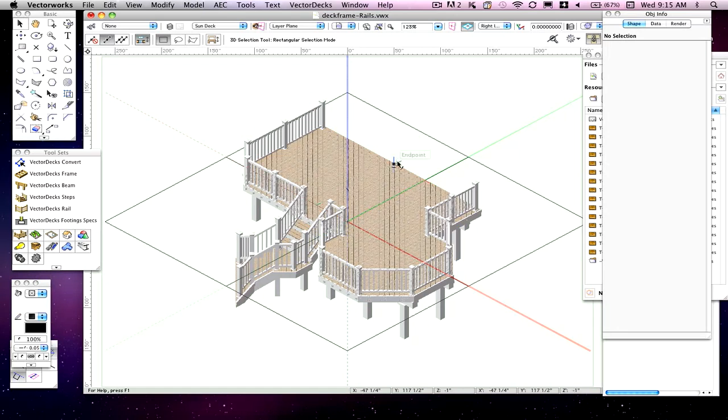In this tutorial, we're going to design a custom set of rails for this sun deck utilizing the frame's sun deck rail settings button with the custom settings option. I covered how to work with all these different dimension changes and options in this window in my custom settings tutorial, but now let's put them to work.

For this example, I'm going to create a wrought iron type railing system, something lighter in appearance. I'm going to keep the railing height at 36. No need to change those post max on center, keep those the same. Now the post on an iron type railing could be smaller because of the strength involved, so I'm going to downsize these to 2 inches.

And the 2-inch width, 2-inch depth. The top rail width needs to fit within those 2 inches, so I'm going to narrow this down to, let's say, 1.5 inches. And its depth, I'll leave that alone.

The bottom rail width, the same thing. It generally needs to be the same or smaller than the top. Let's make that the same as the top. I'll leave its depth the same. I'm also going to leave that opening at the bottom of the rail the same.

Now the vertical pickets themselves in an iron type railing could be quite a bit smaller. Let's make those 3/4 inch, and I'm going to maintain that maximum picket opening to 3 5/8. Now we're ready to apply that change.

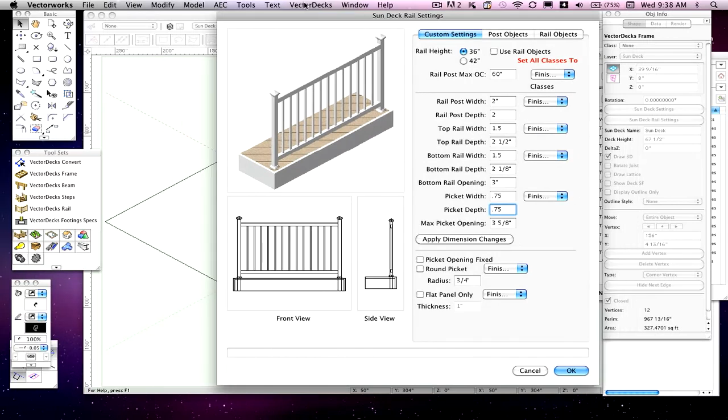All you need to do here is click OK. If you click Cancel, it'll go back to its defaults. So I'm going to click OK, and there's a lot of changes because it's going to change the railings throughout the entire deck. As you see there, it's got that lighter metal iron type of appearance to the sun deck.

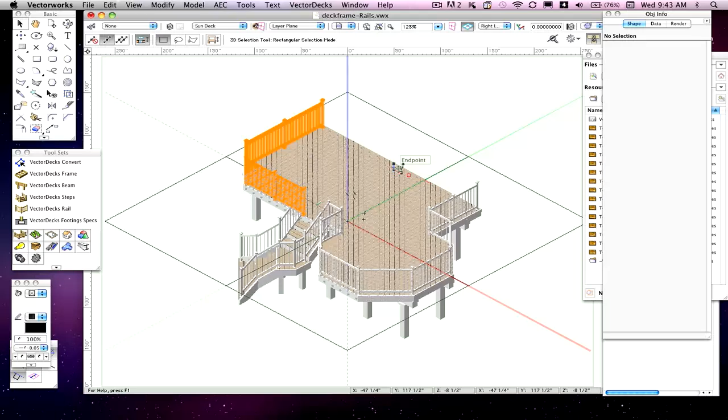And because each rail object and steps had its use deck info checked, the frame settings automatically updated the rails throughout the entire deck. That's the advantage of having that rail control in the sun deck frame settings.

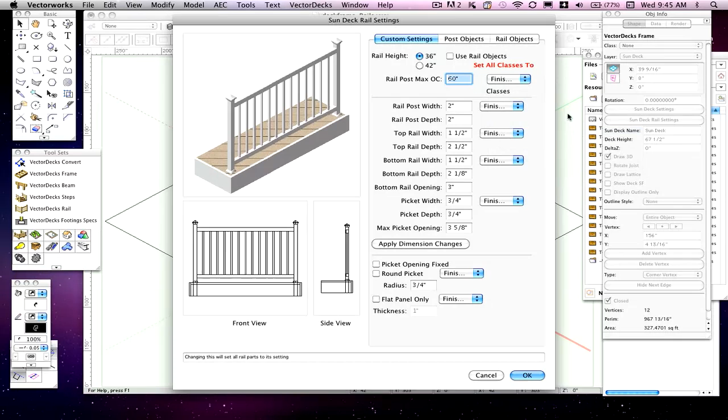Now let's go back into that settings and change the color to that rail. Let's give it a black iron look. As I explained before, you can change each individual color, or up here you can select to change everything on the rail to have the same color. Let's make this black. Now that looks like an iron rail.

I'm going to click OK. Now it'll regenerate and render everything with a black railing system. It stands out. So it's that simple to create a custom rail, make those simple modifications, and have it apply to the entire deck all in one operation.

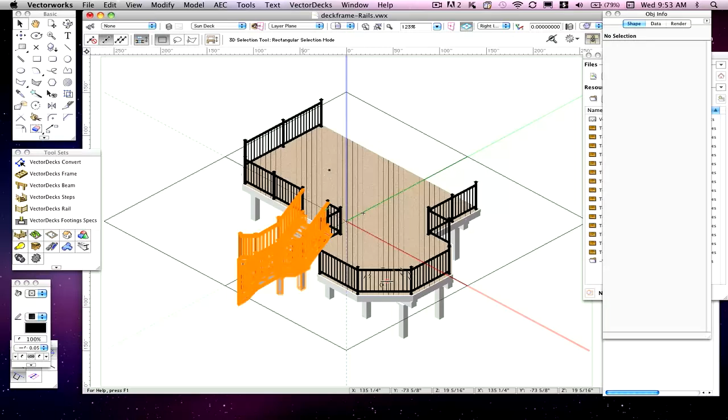Now there's one other thing I added to that custom settings capability with the frame tool, the ability to insert in the center of any of the panels along the deck surface a special little design to break up, let's say, the monotony of all these vertical pickets. I'm going to show you how that works.

Go ahead and click on that frame again and click on the sun deck rail settings. Up here at the top you had 2 other options that I showed in other tutorials, but we're working in the custom settings. These 2, if you click on it while your custom settings is being worked on, you'll see a lot of the options are grayed out.

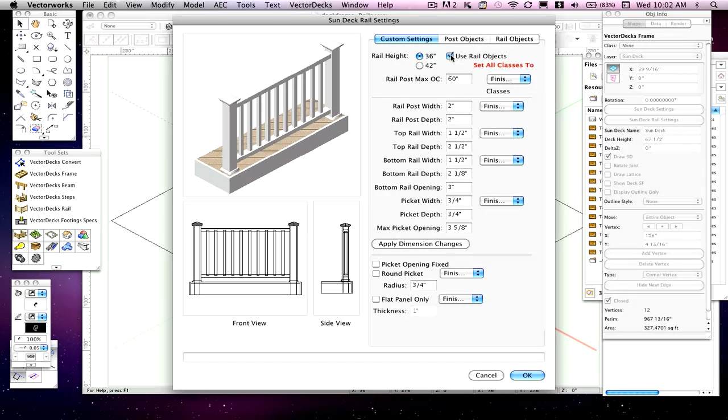To utilize those, you'd have to click on Use Rail Objects. And as you noticed here right away, as soon as I clicked on that, it picked up the settings of those 2 other options. But let's leave that clicked off.

Now there's one option in the rail objects that you do have access to, and that's at the bottom here where it says Railing Center Objects. Now you can click inside this particular drop-down menu, and you'll see you have some options here.

I only have 2 for now, one of each for 36-inch rails and one of each for 42, but I'll be adding more, and you can add your own custom designs, and I'll teach you how to insert those so you have access to them. We'll leave that one by default.

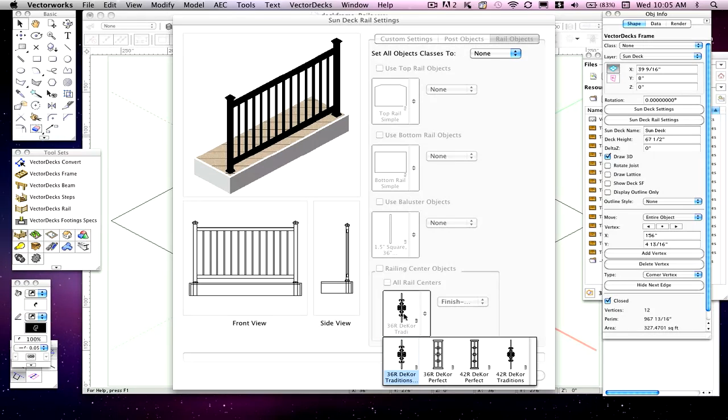If you want to insert it, this is where you're going to go ahead and click on that railing center objects. See, with one click, it's going to show you what it looks like in these views. It also adjusts the pickets if it need be. If your center finish is wider or narrower, it'll adjust that automatically.

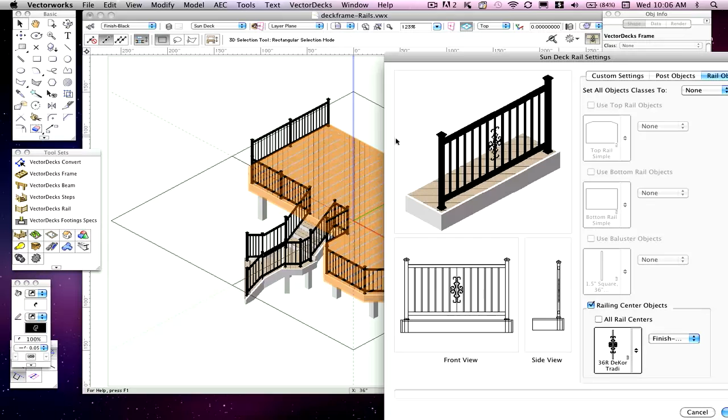And you can also set that color. We had black. Now the next button you see here is to apply this to all rail centers. If you leave this unchecked and go into your document, nothing will change. It'll stay the same.

You won't see any of that finish because it doesn't understand or doesn't know where to physically install them. You will have those controls when you click on each individual rail. But for now, we're going to click on all rail centers. Once you're satisfied with this, click OK. After it regenerates here, you'll see that particular fancy little finish will show up in every single panel across the deck surface.

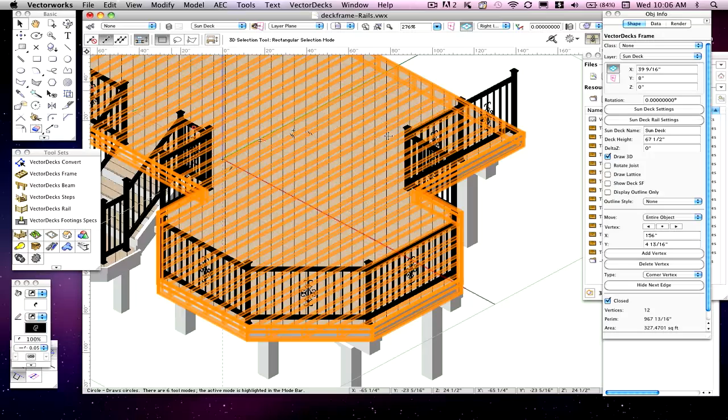Now, in some cases, this little tiny panel here may at times, or as you design your rail systems, you may have some panels that are so small that that particular pattern won't fit.

I'll show you here. Let's go back to that rail again. So we're going to go to Sun Deck Rail Settings and go to that rail objects. This particular pattern is narrow enough to fit in that one little space.

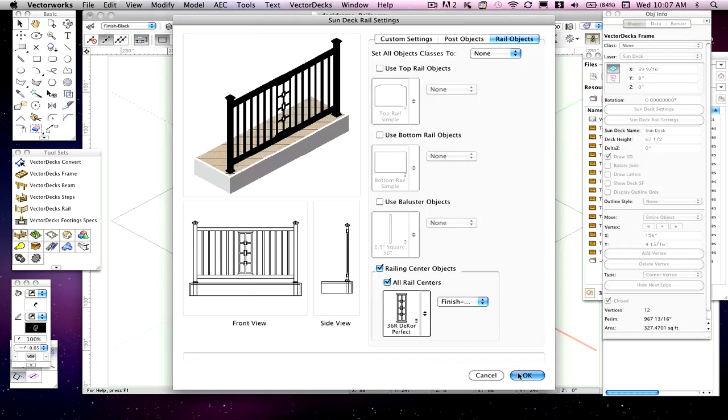But if we change that, this one here is just slightly wider, and click OK, you'll see it won't get inserted in this little rail because VectorDecks knows not to insert any of those finishes if the width of that finish is too wide to insert it into that rail system properly.

In my next tutorial, I'll show you how you can custom select which one of these rail sections across the surface of the deck will actually get that fancy little finish inserted into its centers.